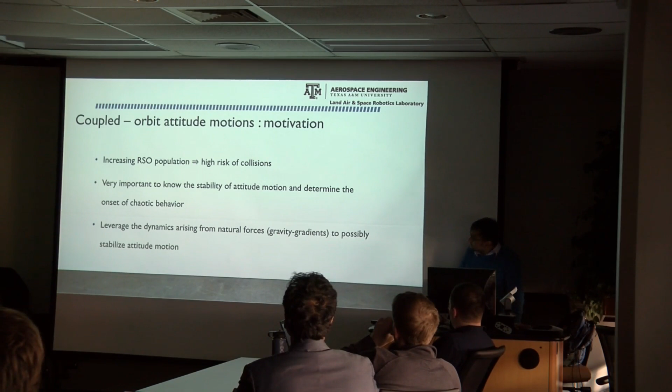Back to this, as I just mentioned, I'm going to skip this. So we wanted to study the gravity gradient on attitude motion and understand the nature of oscillations and characterize the stability of the equilibrium point.

We actually proved that there is not just one equilibrium point, there are many, and it is drastically different with different approximations of the gravity gradient potential. That really begs the question as to whether the high order approximation of gravity is essential or not. Our recent paper shows that it is.

So this is the setup of the problem. It's not a point mass rotating around the Earth, it is actually now a rigid body, and the coordinate systems are defined as the same frame that John used yesterday: radial, tangential, and normal coordinate system.

About this coordinate system, we use a body frame, and the attitude of the body frame with respect to the orbit frame is the attitude that we are interested in.

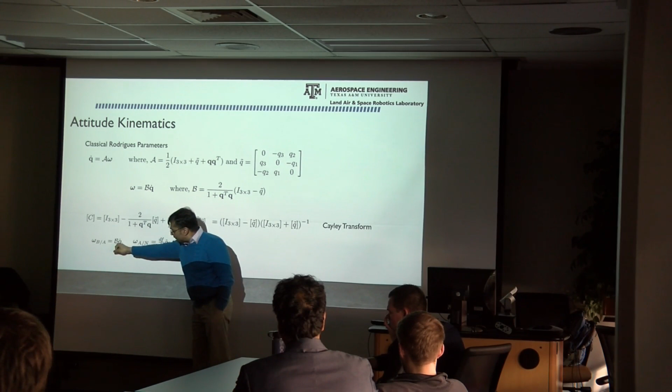which are forced by the gravity gradient, which is also an approximation. We replace omega with basically the transform, which is a function of the attitude times the rate of the angle. Substitute that, and omega dot then becomes a function of q double dot, and we get an oscillator equation. That's one of the new things we have done - this is not available in the literature.

We'll come back, I think. Okay, so this is the process. This is the attitude, the gravity gradient torque.

We do something else that John and also David Siliberto did yesterday in his paper. We not only do differential equations in time, but also convert it using constants of motion. So we actually go to a fictitious time, which is the true anomaly, using the two-body problem. This actually helps us a little bit.

So what happens when we put these in and do the math, once the dust settles, we get a second order differential equation that looks sort of familiar. The right-hand side, although it looks like a mess, is actually polynomial. If we had used Euler angles, we'd get a lot of trig functions on the right-hand side instead.

So in a typical analysis problem of a nonlinear differential equation, what do we do? What is the first thing we do when we're dished out a nonlinear differential equation? Let's say I give you a Duffing oscillator: x double dot is minus x minus epsilon x cubed. What do I do then? Find the equilibrium space — that's the first thing we want to look at.

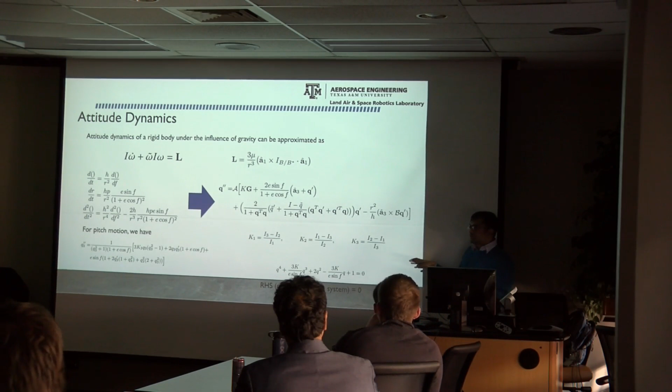However, if we fix ourselves to a circular orbit, it becomes a lot neater — and that's what we did next. In the special case of the circular orbit — and I want to point out this special case is what Randolph and Kane were looking at — the orbit is circular, and they basically showed that the oscillations had some specific behavior, especially the pitch oscillations.

In that case, the horrendous differential equation I showed earlier actually boils down to this simpler one. K is a parameter that's a ratio of the inertias of interest. When we set this to zero and decouple the pitch oscillations, we get something simple — but even before that, my student actually solved it in closed form.

If you just take the pitch oscillations and write out the second order differential equation, he found that this has a constant of motion — that's the constant of motion. And it looks strangely like the simple pendulum.

But the only approximation we make in arriving at this constant of motion is that the pitch oscillations can be separated from the roll-yaw degrees of freedom. In that case, we actually have a pendulum — a glorified pendulum, if you will. It has some extra rational function instead of just the q dot squared, the kinetic and general potential energy.

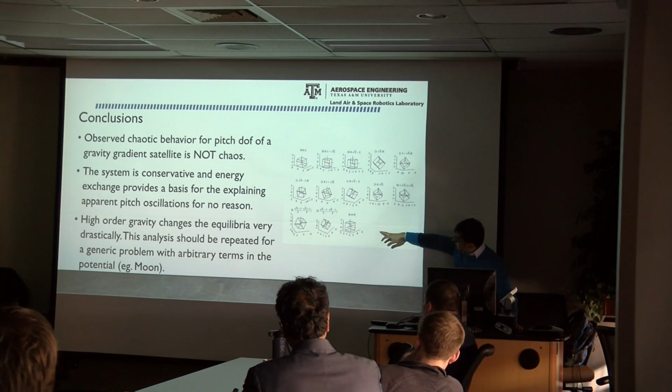Now the problem with extending this method to analyze arbitrary mass distributions is that there is no clear potential like this for an arbitrary mass distribution. There are infinite terms in there, and it's very difficult to find, even using classical parameters, a systematic process to write the equations using that.

So what we're going to look at next is using semi-analytical tools. We want to use Hamiltonian mechanics to repeat the same process, where we can automate the generation of these analyses and look at how equilibria move around by the addition of different terms in the gravity gradient.

So, do I have more time? Not really, you want to keep on schedule. Okay, let me stop here and take questions. I have a few more topics, but this is a good place to stop.

This is a lot of material, but I just want to give you an insight. It's very important, sometimes when you have a discrepancy in either numerical results or in analysis, to go back and ask a fundamental question, and that's what we did here. I have a fundamental question for you.

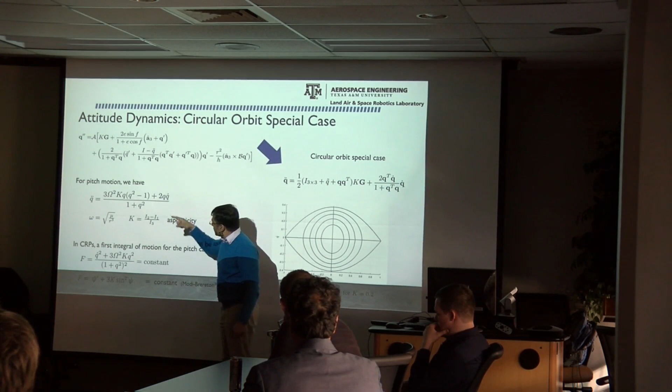Can't see that. So it's been a while since I've been on this, but I'm going to try to summarize it in my own words, and then tell me if I'm wrong. Yes. So the conclusion that this is not chaotic motion is because you can reduce the problem to a finite set of frequencies and not a broadband frequency response. Is that correct? That is half of the story.

The other half is that it was a wrong question to begin with. Asking for a chaotic system makes sense if the degrees of freedom are contained. In this case, they are not. There's a channel of energy exchange with the other part of the dynamical system.

For example, a double pendulum is chaotic, but it's a conservative system. So if we look at a level set, the chaotic behavior happens only because we are isolating one of the links and not looking at what is happening to both of them together. If we look at both of them together, it doesn't really exhibit unexplained changes in amplitude because it is trading off — one part is pumping energy into the other. So that's really the big story here, that we don't have any unexplained dynamics. We have both degrees of freedom.

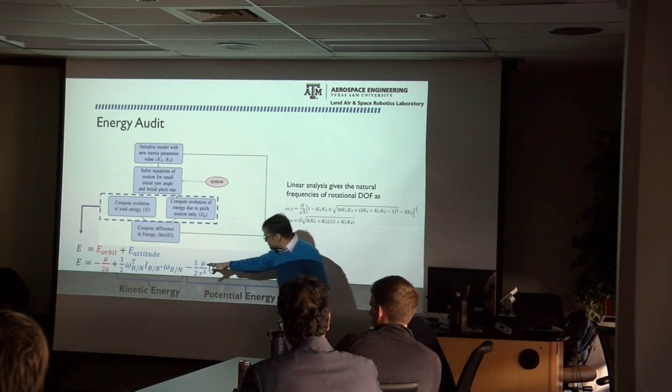The other part of the story is that it was very difficult to do an energy audit because the two bodies are so different in size—one is not even machine precision compared to the area of the other. So we can't really use traditional energy methods for that reason.

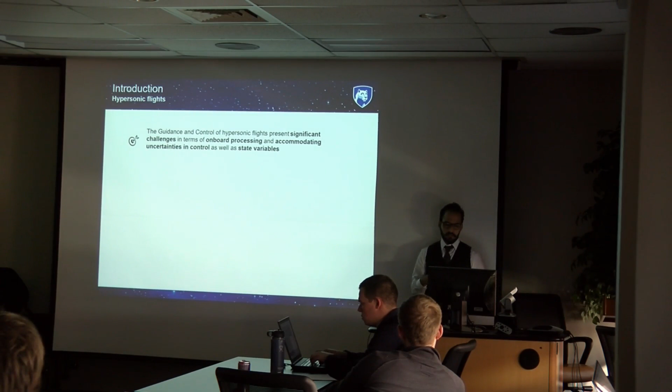We all know that the guidance and control of hypersonic flights present significant challenges in terms of onboard processing and accommodating uncertainties in state as well as control variables. Computing reachability flight intervals is important for the safety and performance of hypersonic flights. Numerical approximations are necessary to compute the reachability sets for nonlinear systems. The main focus of this paper is to represent the reachability set as the level PDF of a system's state at a given instant of time.

Let's consider a general nonlinear system given by this equation, where x(k+1) equals f(xk) plus g(xk) times h(uk), where xk is an n-dimensional state and uk is an m-dimensional control input, and U represents the whole set of admissible controls we can apply to that nonlinear system to get the reachability set.

Mathematically it can be written as this equation. What I mean is: let's consider an initial point, and for computing the Monte Carlo reachability set, we apply a control input. So we apply n control inputs to reach the first time step, giving us n states at the first time step.

Applying again n control inputs to each state, you can see that we have n-squared states at the second time step. Again applying at the third time step we have n-cubed, n^4, and so on. So you can see that this is a computationally ineffective method of computing the reachability set.

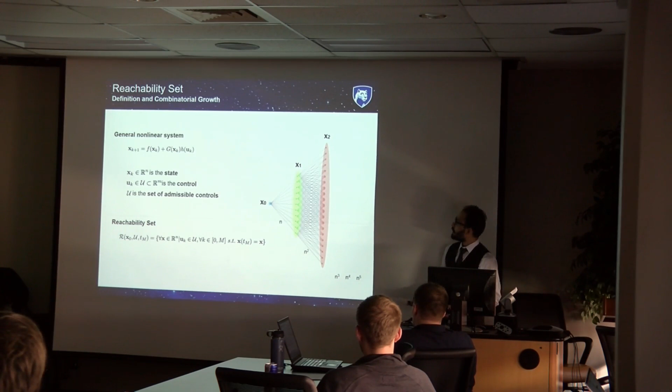We take the Fourier transform of these two histograms, multiply them together, and then take the inverse Fourier transform to get back the PDF of x(k+1).

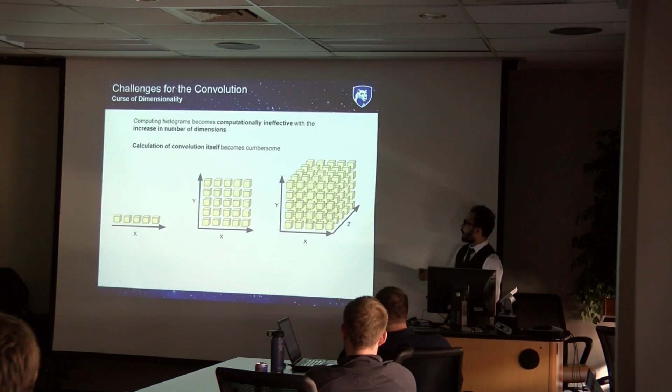So computing histograms becomes computationally ineffective. If we increase the number of dimensions of states, computing convolution itself becomes difficult.

So what we did instead of computing the exact PDF is approximate the PDF using statistical moments. Consider a general nonlinear system given by this equation, which we can write component-wise as given by this equation.

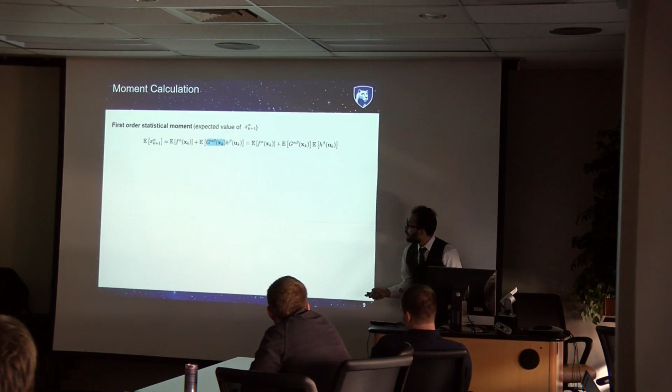We can compute the first order statistical moment given by this equation, utilizing the fact that xk and uk are independent from each other. So instead of computing the expectation value of g and h together, where g is a function of state and h is a function of control input, we separately find the expectation of g of xk and the expectation of h of uk, then multiply them together to get the expectation value of xk plus 1.

Similarly, we can find the second order statistical moment using the same independence assumption between states and controls. We could also find the third order statistical moment, but in this work we only considered moments up to first and second order.

As the dimension of the random variable increases, the number of points we need with CUT8 is much less compared to other quadrature methods, which is why we use this method.

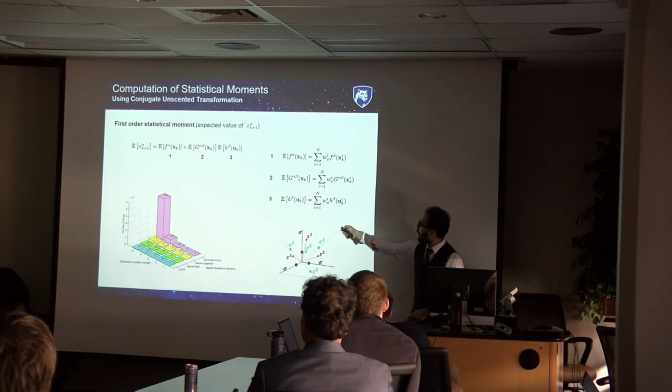So the expectation value of f of xk is given by this formula, where wx are weights corresponding to the state dimension. Similarly, to find the expectation value of h of uk, we use these formulas.

So in short, after computing the desired statistical moments at each time step, we construct the probability density function using the principle of maximum entropy or sum of squares. Then, to generate the next PDF at the next time step, we generate samples from the newly approximated density function to compute states at that next time step.

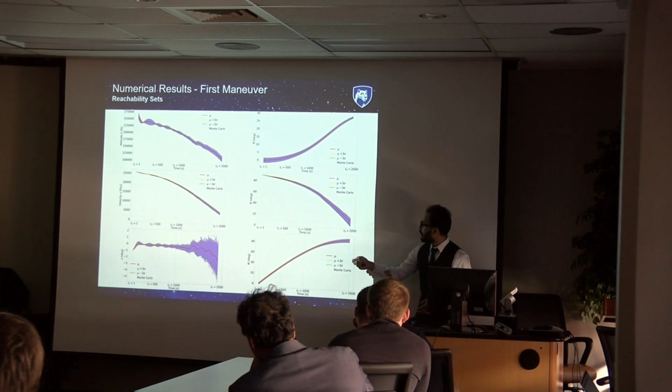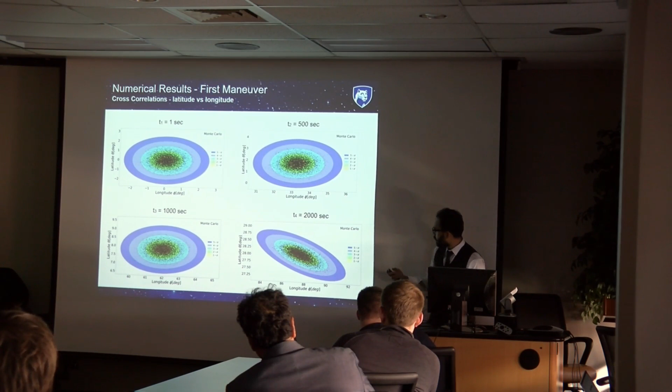Similarly, for latitude and longitude, you can see that almost all of the points lie inside the 5 sigma bounds. So for the second maneuver, similarly we have the control profile.

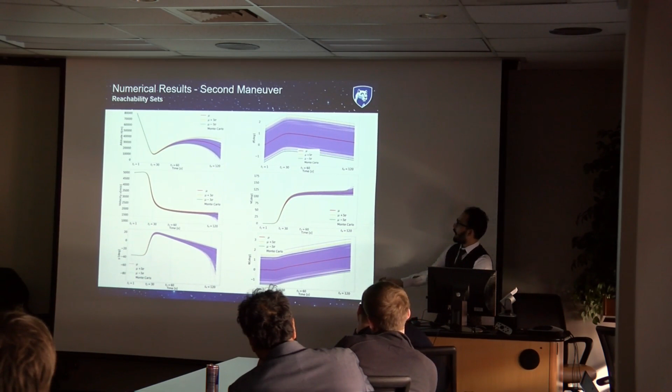You can see that most of the points lie in the 3 sigma bounds, and we also consider the cross correlation here as well between different states at the 4 time steps, given by these plots.

So the cross correlation between H versus V, you can see it's pretty much inside the 3 sigma bound, but here you can see something interesting again: since we only approximated up to second order moments, some of the shape is non-Gaussian. We were not able to capture that non-Gaussian behavior of the PDF.

Similarly, the longitude and latitude cross correlation is given, and you can see that it pretty much lies inside the 3 sigma bounds. So in conclusion, we developed a computationally efficient method to compute the reachability set.

We exploit the fact that control and states are independent of each other, and we developed numerical results which clearly show that this is pretty much a good approach to approximate the reachability set, and it provides a trade-off between computation and accuracy. We can control the number of statistical moments to be computed.

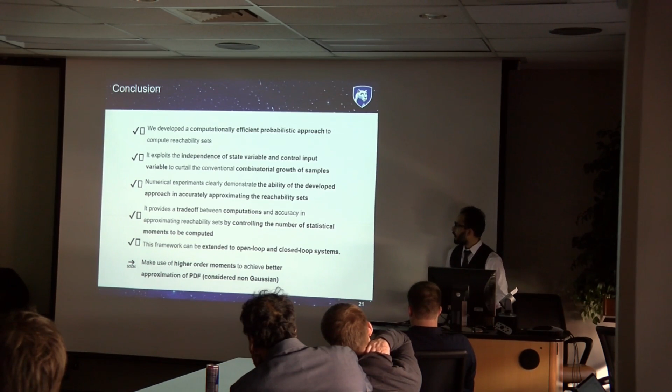Further, you can see that it can be extended to open loop and closed loop systems. So soon we will incorporate the third order moment to see the non-Gaussian effects also of the PDF. Thank you very much. Any questions?

Can you switch to the slide just before the result? One slide before.

Yeah, I'm a little bit confused. So what is PME and SOS? Oh, PME is the principle of maximum entropy, and SOS is the sum of squares. These are two methods with which we can compute our PDF from the statistical moments.

Okay, thank you. Just a comment: if you want to use those abbreviations, it might be better that you mention the full wording, so the audience knows what you're referring to.

Okay. I think when you're explaining your result, if you go back to your two maneuvers, yeah. Can you explain what those red lines correspond to, and what was your controller constraint?

So we took this maneuver from these two papers, where the red line represents the optimal control profile for the space shuttle re-entry with a heating constraint. It minimizes the heating constraint if we follow this red line.

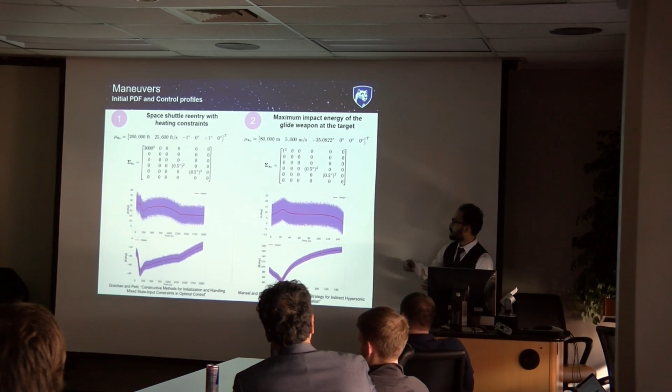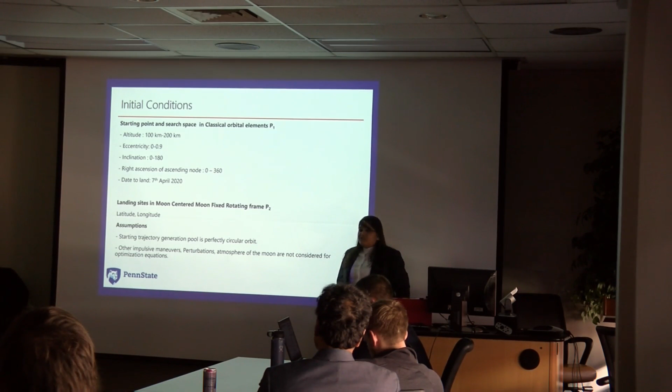Just for calculation purposes, I've selected the date to land: 7th April 2020. My P2 is defined by latitude and longitude in a moon-fixed frame, so it rotates with the moon's rotation. Other assumptions in my calculations are that we're starting with a circular orbit, with no major plane change maneuvers or other perturbations.

Everyone is familiar with Lambert's algorithm here, but I'd like to shed some light on the PSO application to Lambert. Our cost function, which we're minimizing, is the total delta V, a combination of delta V1 and delta V2, using the Lambert velocities applied to the total delta V.

So we're using Lambert: the V1 spacecraft velocity is retrieved from point P1, associated with the R1 vector, and the V2 at the site is calculated using the latitude and longitude of the site, which remains constant.

For the particle swarm optimization, we know a particle swarm is like a swarm of birds that fly in motion together without colliding with each other, landing at a certain location, then flying back together. If you imitate that with spacecraft or dropping off payloads, we have multiple solutions to the trajectories we're starting with.

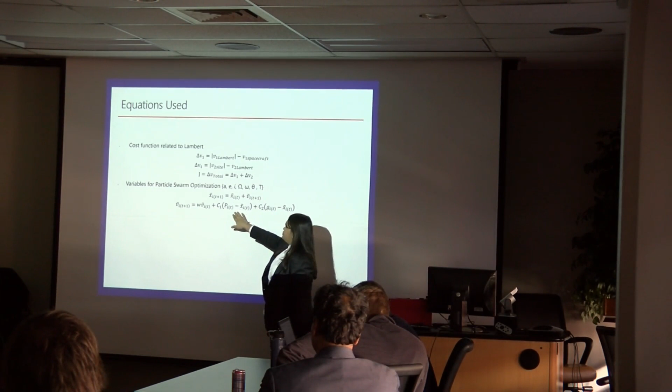Each trajectory has some information, xi, at a certain instantaneous time t. The new information is updated using PSO, which was introduced by Kennedy and Eberhart in 1995: there's an inertial coefficient associated with individual particle information, a social particle coefficient, and a global coefficient that includes the stochastic global term and the regular swarm information, plus the individual particle's previous information, like an inertia.

Applying this to our problem, we're changing the classical orbital elements, our 7 variables, which form our search space. We update each variable with new information, defined by the cognitive coefficient—the individual particle's personal best—and the global best, which is the stochastic coefficient, scaled according to delta V.

So here's where the delta V comes into play for the particle swarm optimization. To better understand the process for PSO to Lambert, we start with a random population of 100 trajectories generated in the range specified earlier, 100 to 200 kilometers altitude in the northern hemisphere of the moon. Starting with 100 trajectories having a random combination of A, semi-major axis, E, I, omega, theta, and time of flight, the Lambert gives 100 total delta V's.

Now what our PSO does, before we apply PSO, we select the 10 best delta V's. What is best? We want a minimum delta V, right? So we get a total of 10 minimum delta V's.

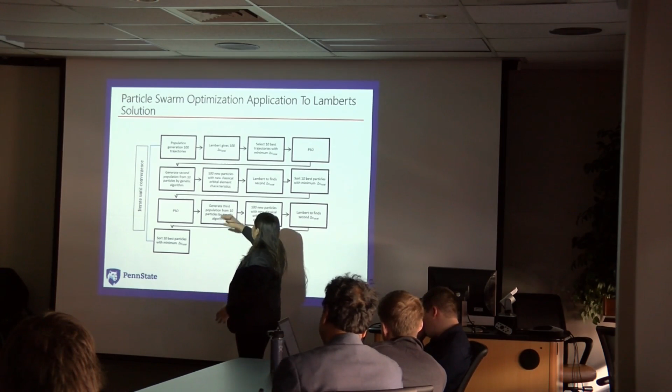Thus we have a new swarm, a new population, based on the first population, and we apply that to find the total delta V's. We find the minimum 10, sort the 10, and apply the PSO again. We repeat this process until we reach convergence.

The goals of my research are to minimize total delta V. You define 10 possible combinations of classical orbital elements and time of flight that pass through the landing site, our point P2. The combinations of classical orbital elements are associated with point P1, which is our starting location for the descent. We're also applying this to minimize total delta V and time of flight together, but that's still a work in progress.

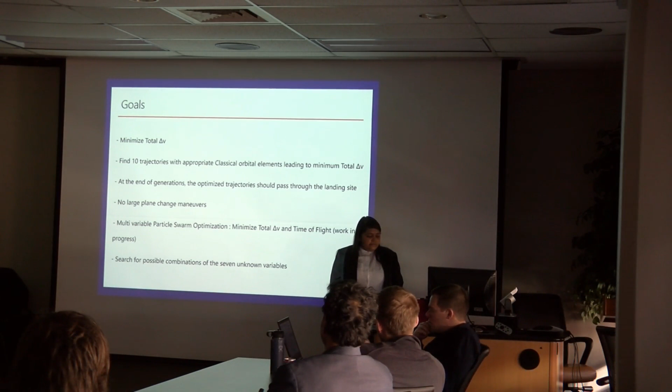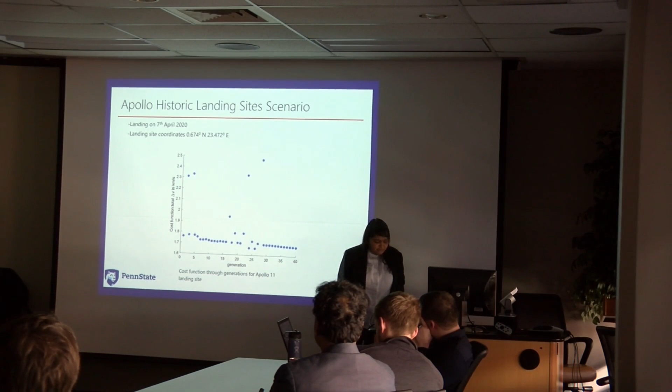To provide a result summary of my findings, I found that for a lot of these landing sites, starting with 8 degrees north, highlighted in green, the location of P1 calculated after 45 to 50 generations of PSO with Lambert showed that all these trajectories fall in a range closer to our P2, our landing site. Same goes for the 20-degree north and 20-degree east case.

The delta V change is better in 20-degree north and 20-degree east. We have a 33% minimization, going from an initial delta V to a final, optimal delta V, a reduction of about 33%. For the other case, it was around 2%, going from about 1.6 to a final of 1.67 kilometers per second. However, the ground track for these showed better results than that.

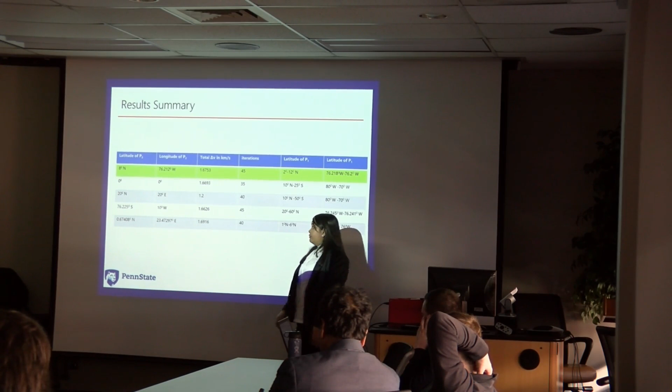This is still a work in progress, so I would not like to make final conclusions on these. For other landing sites, if we flipped the coordinates to 76 degrees south and 10 degrees west, the behavior of ground tracks was not that great. However, our delta V versus generation graph, the cost function, did show convergent results. So while I'm still researching ground tracks and landing sites, for Apollo 11 it does fall in a range even closer to our landing site that we begin with.

So while we're still researching this, I'd like to provide some conclusions: we can have multiple precision landings on the lunar surface using particle swarm optimization, provided we have more results and theories to support this. I found that after 40 to 45 generations of trajectories, my search space is still 100 to 200 kilometers, and the delta V calculated was in the range of 1.2 to 1.69. PSO can also be used to optimize landing trajectories on Mars, provided we include atmospheric models in the PSO.

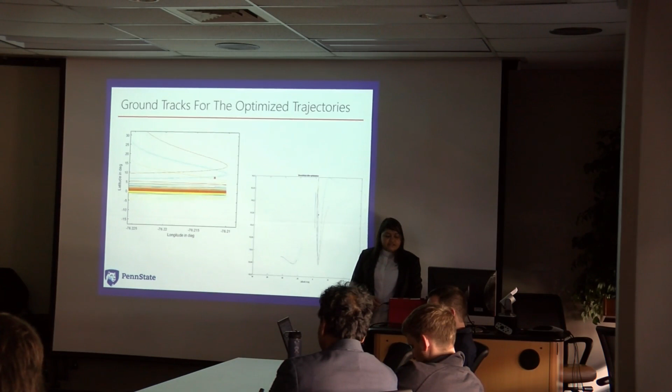Yes, I've tried this for 100, 200 to 300 generations too. However, as I mentioned before, initially I have a 100 by 7 matrix, so it's really hard to compute. It follows a normal behavior even after 45 generations, and the behavior of A kind of crashes down, like how we're searching for values of A.

It goes through like 1,600, 1,500 kilometers to the semi-major axis with respect to the surface. So after like 100 generations or so, there was no point, like after 60, there was no point in running these iterations for a while. But there is this phenomenon called stagnation, where it appears to converge, but it hasn't really.

So I'm asking, have you done anything to explore how you move it from the stagnation condition and allow it to continue to make progress? Not really, I haven't used a certain conditional statement to basically do that. I'm trying to see its own behavior naturally, how it works. We haven't got to that point yet.

The system, by having so many variables in it, you've got a huge search space, a 7-dimensional search space, and we're looking at perhaps trying to cut that down and seeing if we can then go out to further generations. We're having computation problems right now.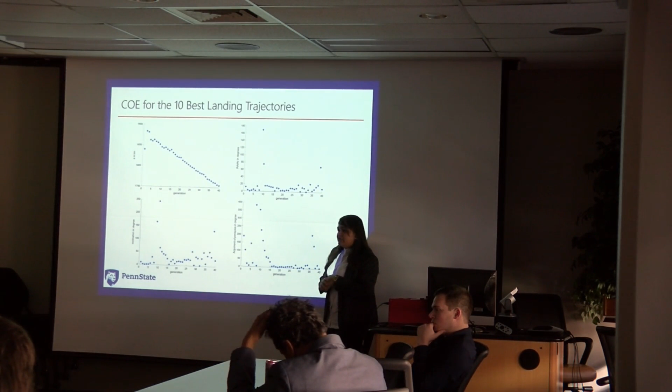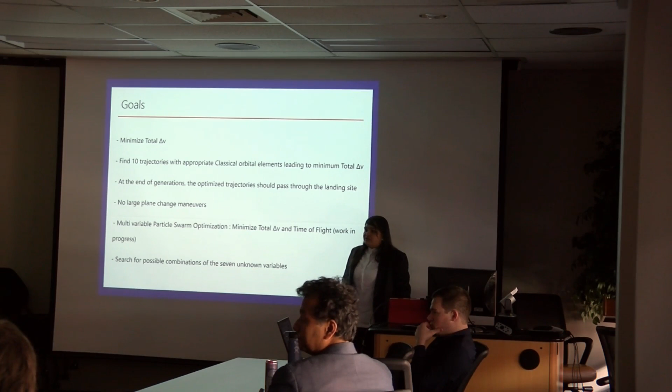I mean the search domain, you have like the mean value must be the radius of the moon. Yes, so once I go beyond the radius of the moon... What is beyond that? You crash. So 1737 kilometers, semi-major axis of 1737, that's the radius of the moon.

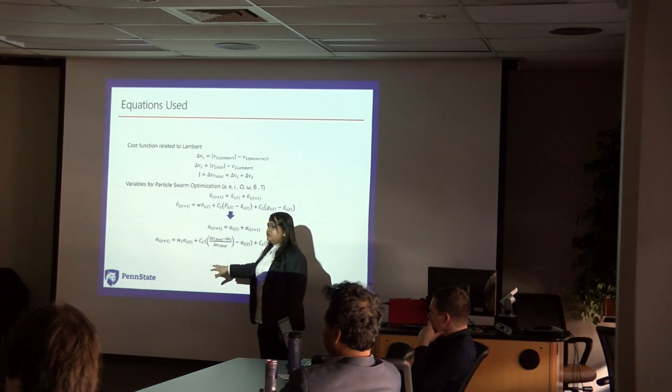Maybe the first iterations are to lower A, and then A will be constant, following what Dr. Moulton was saying: maybe getting lower values for A will lower the probability, and then when you reach the level for A the algorithm will adjust all the values. We did have a problem at the beginning with the A values going too large or too small, so for that we changed this coefficient; depending on what combination of coefficient values you choose, your change in A can be controlled. I'm trying to implement a conditional statement, but I think that would not make it natural.

Quick question: are you accounting for lunar terrain variations? Because there are very significant mountains and craters that can affect where you actually land relative to the radius of the moon. Also, any human factors about deceleration, the terrifying thing that you've got a delta V that starts when you're 100 meters above it.

Around 10Gs, very interesting. When I first started this research, I was looking into a lot of terrain features and the LCAD software, how they go through image processing and evaluate the terrain. But for simplicity of the calculations I haven't included craters, because I'm just starting at an altitude of 100 kilometers above the surface of the moon, assuming this is a perfect distribution.

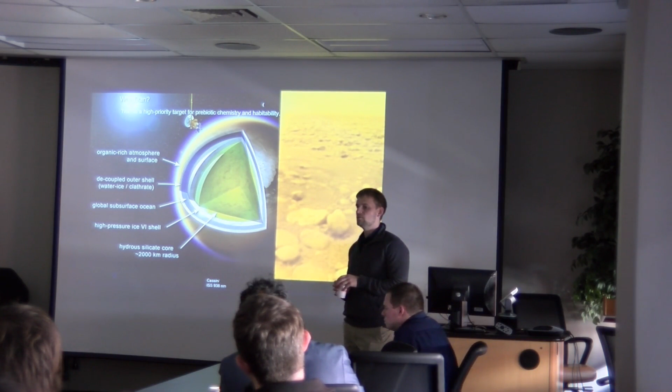These organics in the atmosphere, methane is an organic compound, and solar energy from space comes in and - again, I'm not the expert at this, I won't claim to be a scientist - breaks down these compounds. There's a lot of organic chemistry in the atmosphere, and they believe it resembles what conditions were like in early Earth. So understanding Titan may mean understanding our own origins, and it's a very, very compelling place to visit.

And here's the point reiterated: because of this thick atmosphere, the mission design itself is vastly simplified. Think of other missions to these outer planets - I'll choose Clipper, for example, or Cassini. When you get to the planet itself, before you even visit the moons, you have a very, very large maneuver to stop yourself, to slow down and go into orbit about the planet. But we don't have to do that because we have this big pillowy atmosphere to absorb all the energy we've gotten from launch and from our inner solar system cruise. So this not only simplifies the mission design and makes trajectory designers' lives a lot easier, but it simplifies the spacecraft system itself, making it cheaper and perhaps fitting into a New Frontiers class mission and not a flagship mission.

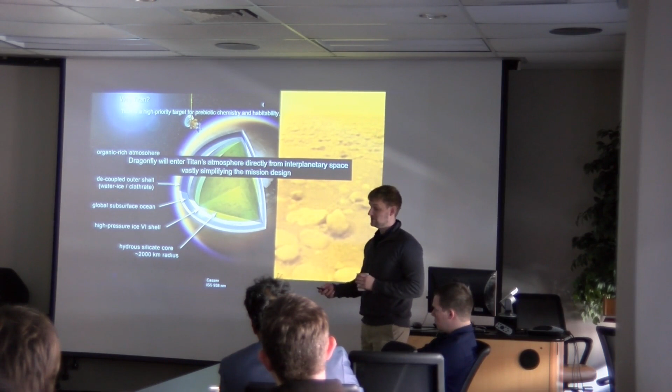Okay, so let's talk about this quadcopter concept. Really neat. I talked about the thick atmosphere. What that has a direct relationship to is the power needed for hover.

It's 1/40 of the power to hover on Titan compared to Earth, and that's because of the thickness of the atmosphere and the gravity. It's 1/80th of the power required to hover on Mars. So it's a lot harder to fly a quadcopter on Mars than it is on Titan.

Also, you might think flying a quadcopter around on Titan is pretty risky, right? Because you'd probably crash one on Earth. But there's really no sustainable winds on Titan. It's far away from the sun, so you don't have the heating of the atmosphere causing tornadoes and things like that. So it's a very benign place to try to fly a quadcopter, and that's good because we don't have a lot of power available.

We have an MMRTG that powers batteries, and it flies approximately once every what we call a T-Sol, a Titan day, which is about 16 days.

So this aspect of the mission is really interesting. It's super interesting to use terrain relative navigation. If you don't know about it, you should read about it. I'm really jealous of the engineers who work on that, by the way. They work right down the hall from me, and I hope to be involved with that at some point.

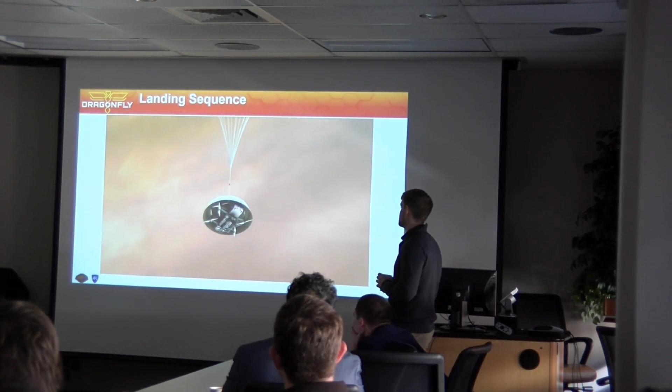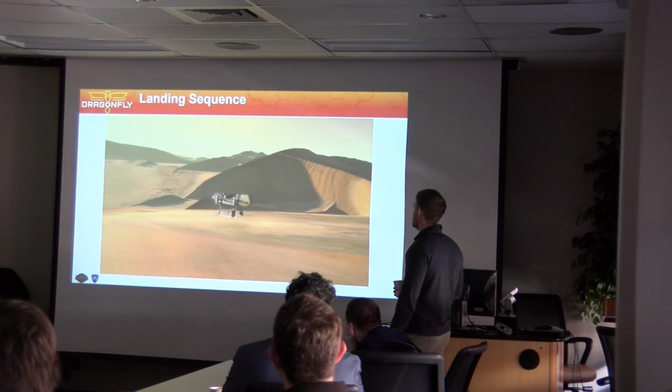Okay, so here's just some eye candy for you. This is after it's entered the atmosphere and released its parachute. Sorry for the glitchiness, that's atmospheric disturbances. Right, I lied about the wind—that's the wind. So it's cool to look at, but this is actually how it's going to land. It's not going to land on airbags or anything. It's going to be released from the aeroshell capsule.

That's a high gain antenna in contact with Earth. It's not that bright on Titan—it's actually closer to what conditions look like at early dawn on Earth. There is enough light to see.

So the first thing we did—I'm not saying this is the best way to do it, this is what we did—you start with a blank sheet of paper and you say, okay, how do I get to Saturn, how do I get to Titan, the best way to get there. Generally speaking, you do some sort of broad search. There's a lot of ways to do this. Like I said, we did a broad search, and the broad search results in a bunch of ways to get to Saturn, a bunch of ways to get to Titan.

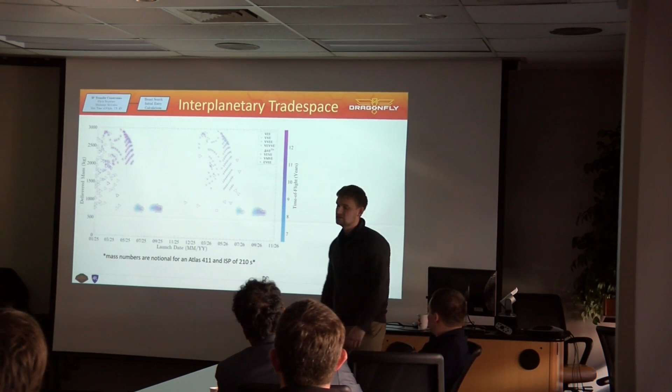We knew that we were going to be on the upper end of this curve. We weren't going to be down here. We're not going to send a 500 kilogram spacecraft. We knew that. So we maximized mass. So we selected this VEE solution. So it launches from Earth, flies by Venus, Earth twice, then heads off to Saturn.

And what you're basically doing here, if you plot these trajectories in the space of energy, is pumping up the trajectory's heliocentric energy to minimize the energy necessary for launch. Now these trajectories themselves have a lot of advantages. So this VEE is right here, and this EVEE is right here. And one of the tricks that a lot of trajectory designers use to get a backup launch trajectory is they'll tack on a one-to-one Earth resonance.

So you launch from Earth in a one-to-one resonance with Earth, and you come back, and basically you're on the same trajectory that you would have been had you launched a year later. So this trajectory and this trajectory, after that first Earth flyby, are qualitatively the same. And if you do a little bit of work, add some degrees of freedom to the problem, some maneuvers, you can actually make these trajectories hit Titan completely equivalently.

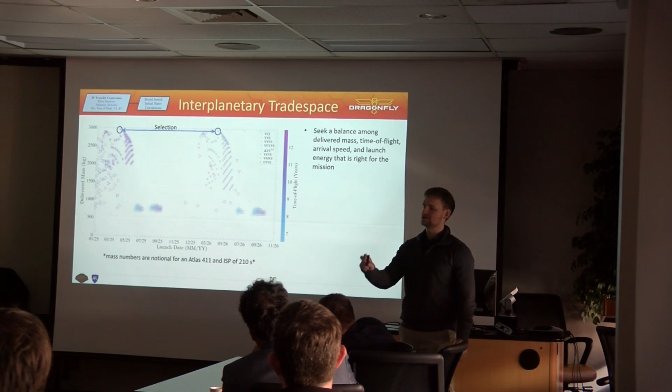So what I mean by equivalence is that, at some altitude above Titan, call it 5,000 kilometers, seven states are matched: position, velocity, and time. And that's across the primary launch period and the backup launch period. It completely locks in the entry. And spacecraft designers love this because no matter when we launch, we have a constant entry condition. And it's also operationally very simple.

So you can think about, there's a lot of manual effort. I believe most of the space mission's cost is in labor. And so there's a lot of manual effort in scheduling all of these activities. Whole engineering teams stood up to rehearse what happens when you land, this and that. And so we have a constant condition. This is very, very simplifying from a programmatic point of view.

Okay, so I'm just reiterating what I just said in words. Launching, hitting the same conditions. So there's two very simplifying things going on. One, we have a backup trajectory that's completely equivalent. We're getting to Titan the same way across the entire launch period.

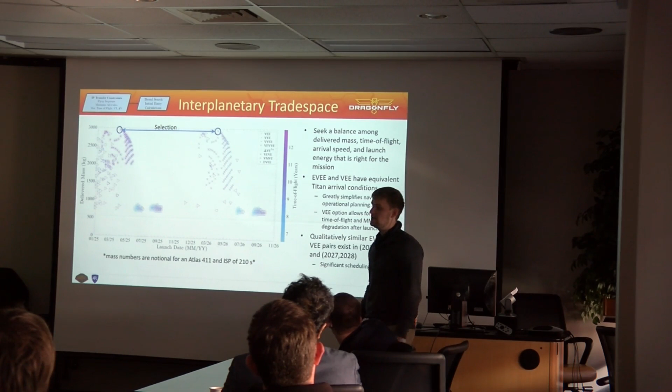We have no large maneuver throughout the entire trajectory. We don't have to slow down at Titan. We're using that large pillowy atmosphere. So this is a very ideal solution for us, save the fact that we have to fly by Venus, which causes some thermal headaches, but in this case it's pretty benign because we're flying by Venus at a high altitude.

Okay, so what we did is we took that trajectory and we actually did do some time optimization with it. So that last Earth flyby provides your final kick out on your way to Saturn. Turns out that there's a monotonic relationship between your Earth flyby altitude and the time length of that last leg. And we took ourselves the whole way down to our 1,000 kilometer altitude constraint that we self-imposed. If we go lower, we can get to Titan a month or two earlier.

So here's your Titan arrival date versus launch C3. C3's not changing that much, but we basically cranked that the whole way down. You don't get that for free when you shorten the length of that last arc on your trajectory. You enter the atmosphere faster, and so you're upping the G loads on your shell. It turns out that was a good trade for us because we're still entering the atmosphere under our 12G constraint.

Okay, so I'm going to take you through sort of the mathematical process of how we compute these spaces. We documented some of this in a paper in Snowbird, and then before that, a lot of this is documented in actually a Clipper paper, because math is math, and it applies to Clipper as well.

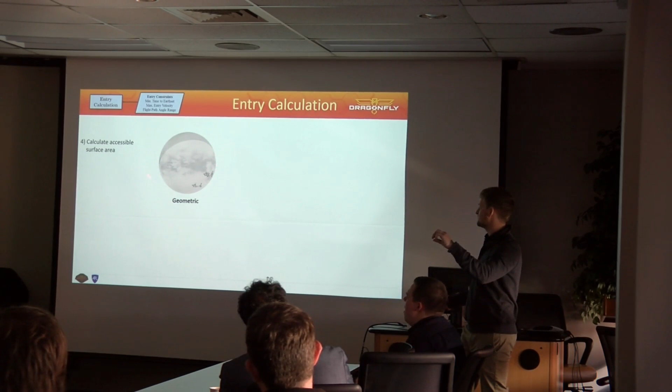But take a look at this point. So we're coming in at a hyperbolic velocity. If this were on a hyperbolic trajectory, if that trajectory had—this is mathematically impossible to pretend it is—a radius of periapse of 0, it would hit right there on Titan. But as we increase the radius of periapse, it will form concentric circles on Titan if you take the entire space. Constant radius of periapse, you change the orientation of the same hyperbola coming in the same direction, and it's going to form concentric circles.

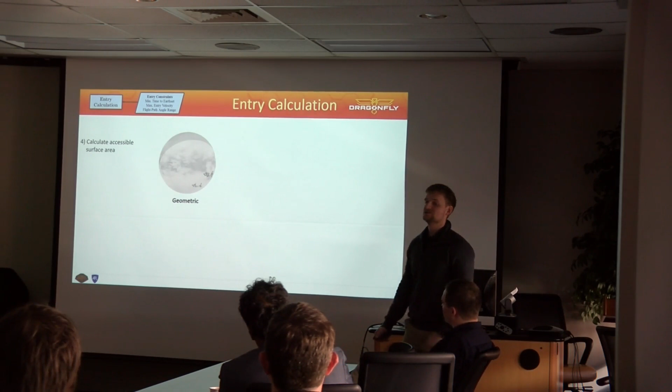So that's given one. So a scientist comes and says, I want to hit some latitude, longitude in the dark area. You know right away it's impossible.

Now you can take the same idea and fold in your flight path angle constraints. Flight path angle maps directly onto that carpet plot I showed you before. It maps directly to G-loads, and G-loads are the driver here. So if you come in too steep, you break your 12G constraint. If you come in too shallow, you're not going to—you're basically going to do what you see meteors do, kind of just graze the atmosphere and keep going.

You're going to do that on Titan. And so this is if you're coming in too steep—this is 0 radius of periapse again. Anything here, you're going to be coming in too hot, and you're going to damage your hardware or destroy it. There's a very thin line here, and this is where you're going to skip out of the atmosphere. We used a very crude first-order approximation of when you skip out of the atmosphere—it's good enough for our purposes. But what you're left with is an annulus, and you don't see it all here. You're left with an annulus of accessible regions on Titan.

So this is great, except we still have to contact Earth once we get there. So not everything on this annulus can contact Earth. So what you do is you know your Earth subpoint here. This green line here is Earth rise—so if I'm here on Titan, right there, Earth is rising over the horizon. This magenta line here is actually when you have 61 hours until Earth set. That's our constraint, so we can't be on the other side of this magenta line. The red line on the other side is actually Earth set, about 180 degrees offset.

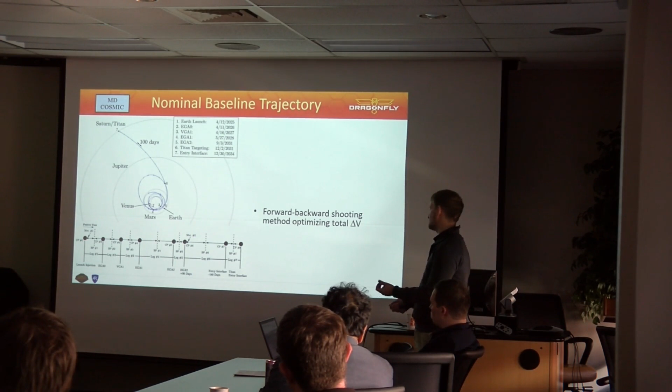Okay, so now that we have this trajectory, most of the hard design work's done, but you do have to make it proposal or flight quality, and to do this we use the Cosmic software package, but at its core it's just a multiple shooting method. You have a set of controls, a set of constraints. If you have a good enough guess, you hope your nonlinear optimization algorithm can converge on a feasible solution. It does pretty easily because we have a pretty good guess worked out. Once you have that, you can map out your entire launch period.

The trajectory is mostly ballistic. So if we had no Earth biasing, our maximum delta V would be 16 meters per second, and that's even with matching the conditions of the Titan's surface. So it's almost a purely ballistic problem where we start interfering with it with our own biasing.

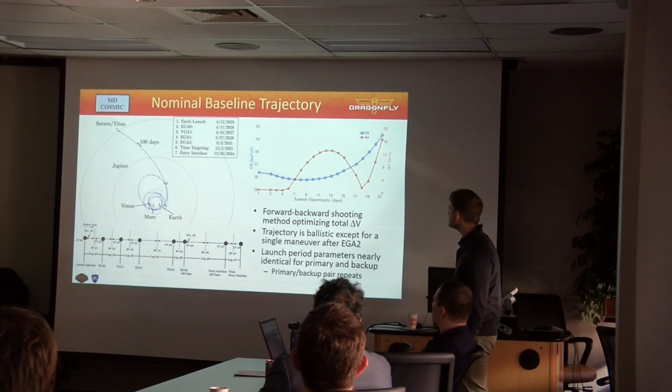Okay, I don't think this is of great interest, so I'm just going to skip this. Okay, so this is just how, once you have the entire launch period worked out, you take the maximum launch energy across the entire launch period, because it's not constant.

Take that, you map that to these publicly available C3 curves for the Atlas launch vehicles. So it's C3 versus lift mass. We know we're right here. It's very close to an Atlas 411. Who knows what we'll actually launch on? That's just an example, but it's classified as an intermediate launch vehicle.

Okay, navigation. So here's where the false confidence comes in. We have a navigation loop. I think the real take-home point here is that the entire delta V budget is dominated by statistical factors - your probability of hitting the Earth, along with all the statistical factors you'd take into account for any space mission, because you never know exactly where the spacecraft is, you never have the thrusters characterized perfectly, so you always have uncertainty associated with it. All of those uncertainties added up make our delta V budget.

It's low. We view it as a pretty routine mission from a navigation standpoint in interplanetary space, and the reason is because of the legacy of all the missions that came before us, like Voyager, Cassini, Galileo - now we have Juno. There's no part of this mission that hasn't been done before: atmospheric entry, biasing with respect to the Earth with an MMRTG, things of that nature. So we're taking lessons learned and hopefully improving upon them from past missions.

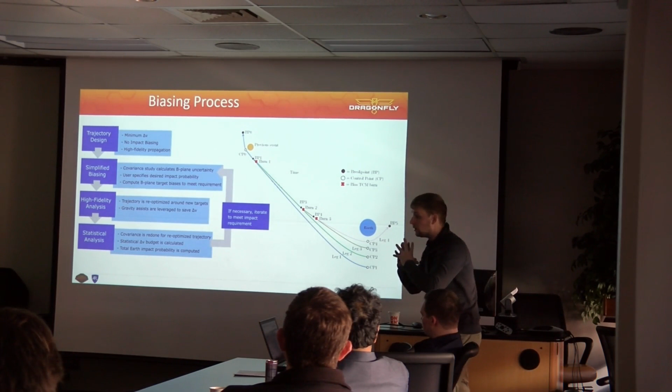This is a picture of what biasing really is, and if you didn't understand my description earlier, maybe this will help. So you picture one of our Earth flybys here. Now the goal is to keep the Earth impact probability to less than 1 in a million. The farther you are from Earth, you have longer time for that error ball to grow as you propagate the dynamics forward, and because that covariance will be large, you have to start with your aim point at Earth higher than what it should be. So if the spacecraft died here, it would safely miss Earth, have less than 1 in a million chance of hitting it, and move on, hopefully not come back and hit us 100 years later. Don't worry, the half-life of plutonium-238 is not going to be what it is in 50 years. But as you get closer to Earth, the mapping gets nicer - you move it closer and closer until you hit your final aim point.

This is a flow diagram of the process I alluded to earlier. So we start with our nominal trajectory design. We have a simplified biasing analysis based on the Lambert tool set, which is basically a linearization of the two-body problem. That linearization gives you a delta V guess of how to hit these biasing targets. Because it's a linearization and a crude test, the delta V numbers are terrible. So you loop that through our high fidelity optimization. You hope the high fidelity optimization does not break the 1 in a million chance of impact. If it does, you loop and repeat.

Okay, so how much savings do you get from the re-optimization? The delta V numbers are terrible, I'm exaggerating. This is the linear guess for the biasing, with all the biasing included for our nominal baseline trajectory. With the linear analysis without optimization, you get 169 meters per second. If you go through that optimization loop that I just quoted, you reduce it to 112.

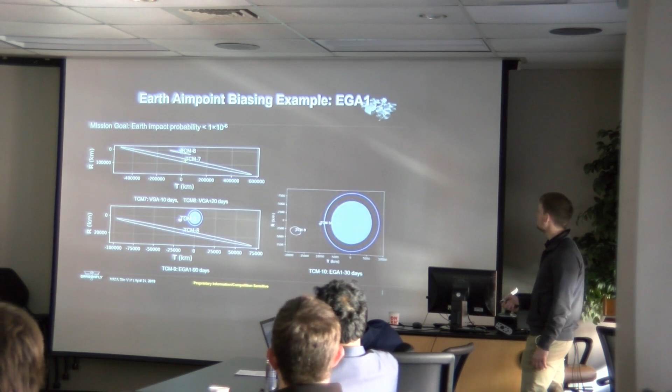As you get your OD updates, and as you move closer to the Earth in the time domain, these ellipses start to shrink and they get nicer, and you do your next TCM, the whole way down to the very final one. This is actually our target point at Earth. This circle here is what's called the impact radius, so this is a mapping to the B plane. What will happen is you're on a hyperbolic orbit and you're inside this impact ellipse, you're going to circle around here. It just looks different like that.

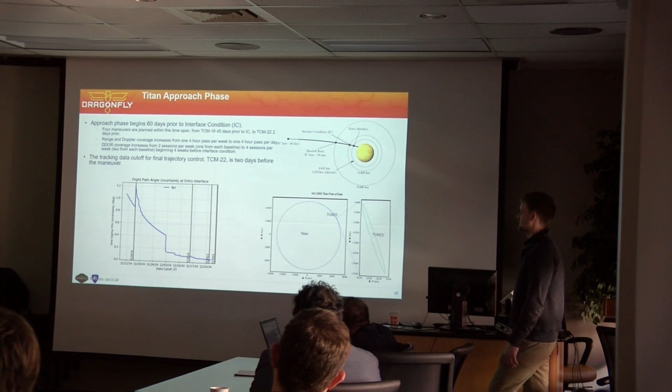So, assuming that the project is selected, what is left for you all to do? What are the big things that you have to do?

Yeah, so a lot of it now becomes - I think Jim can probably speak to this better than me - a lot of it becomes the fine details to actually fly the mission, all of the interfaces. You have to have, everything becomes process control basically. So you have all of these interface documents. We have to work with the launch vehicle vendor. We have to set specific requirements on the data passed between institutions. So there's a lot of process and rehearsals, data rehearsals, things like that. It's a lot of very detailed work that we have to have in phase B.